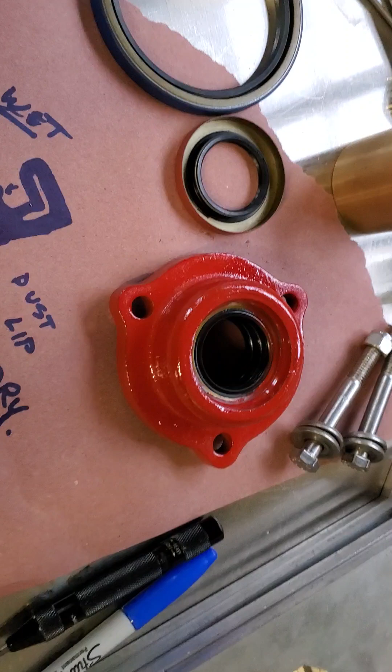I'm down for a few days at least, waiting for some parts from the machine shop and waiting for my radiator core to show up. So I'm tackling some small projects, namely replacing the seals on my PTO flange.

It's pretty self-explanatory, pretty easy to do. I think the only pitfall on these is the directionality of the seal. Sometimes these are pretty much all similar, but sometimes it's a little bit ambiguous which side goes on the dry side, which side goes on the wet side. So here's how I keep it straight.

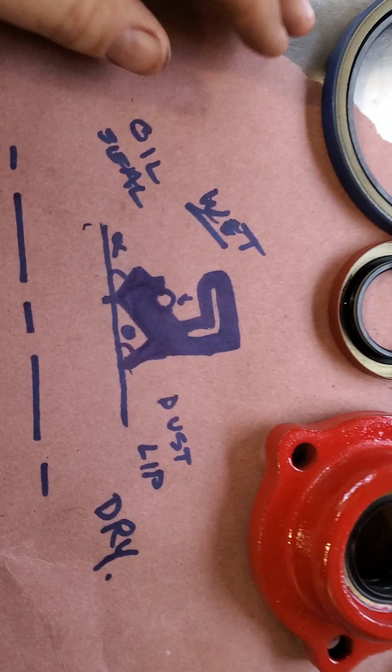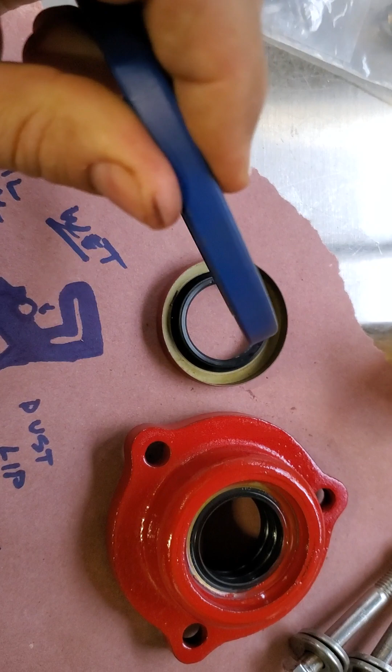If you were to look at all of these seals, they make these in all kinds of flavors. You can get double lip, triple lip. Some have garter springs, some don't. Some have fully encased steel reinforcement rings. Some are open shell, like this one. In this case, the open shell is kind of the Captain Obvious one. The open shell typically would point towards the wet side, and the garter spring would point towards the wet side.

On this example, it's not so clear, because number one, it doesn't have a garter spring, and number two, it doesn't have an open shell. So how do you keep it straight?

If you put them in backwards, they will leak, and they leak in really short order. Let's say I'm using this on a crankshaft pulley and I put it in backwards - as soon as I start that engine and move it 5 feet, that sucker's going to be pouring oil out of the seal.

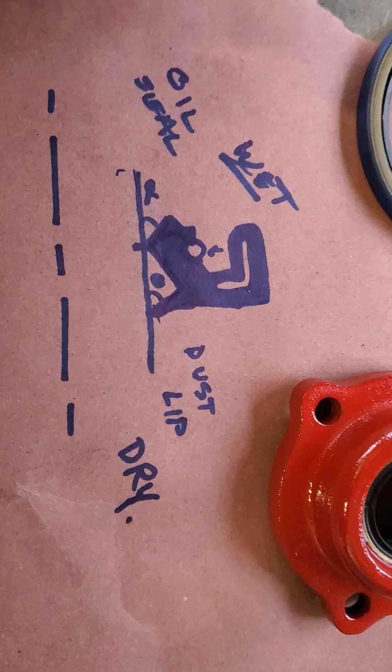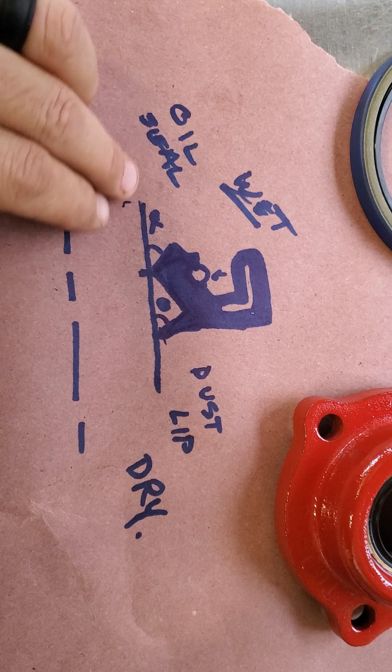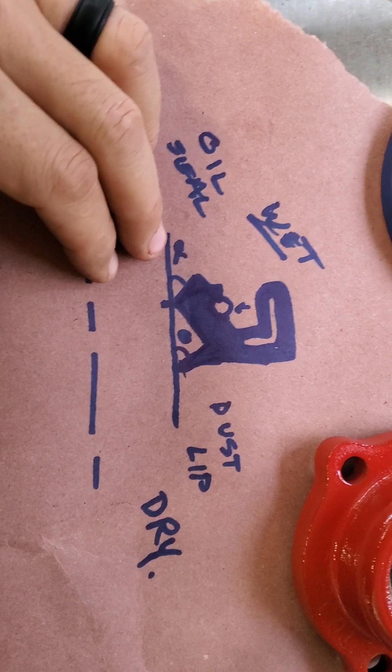So how do you keep it straight? Here's kind of a schematic. If I were to cut one of these in half and look at it in the side view, you've got the center line of your rotating surface, and then the sealing surface itself. So this would be the shaft surface, and as long as it's fairly smooth, no nicks or gouges, and as long as it doesn't have a tremendous amount of run out, these work great.

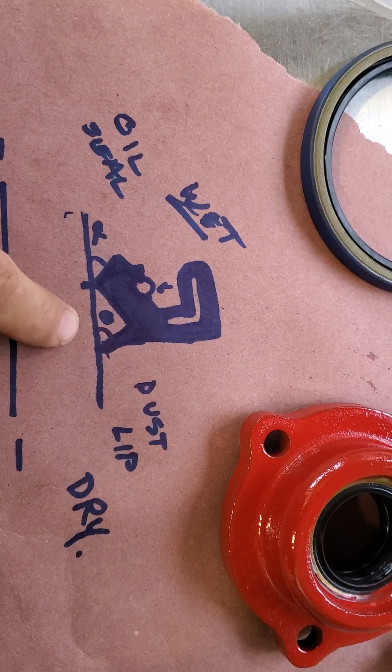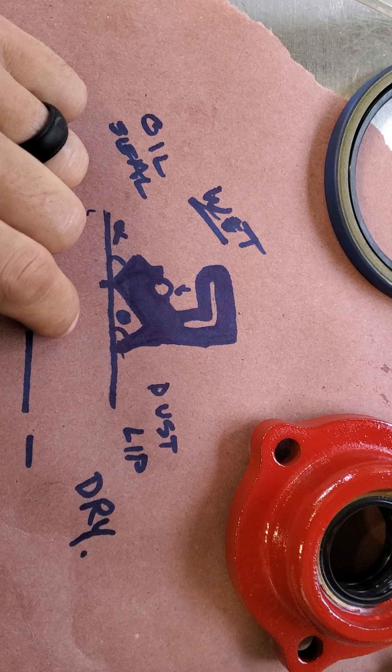The seals, again, I had mentioned they make these in a bunch of different flavors, but they all have two common components. One is they have a sealing surface, and then they have like a dust lip or something to keep crud from the dry side from migrating back through the seal and potentially interrupting the seal integrity.

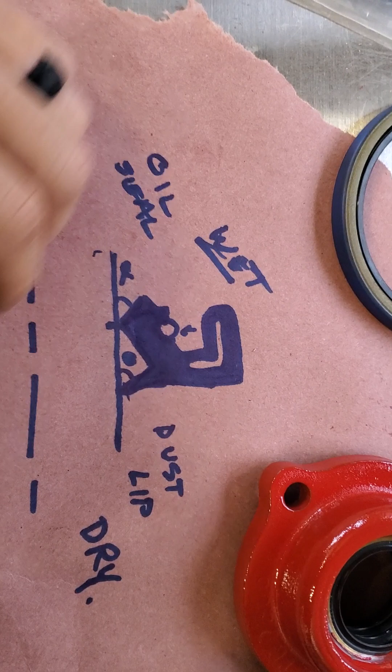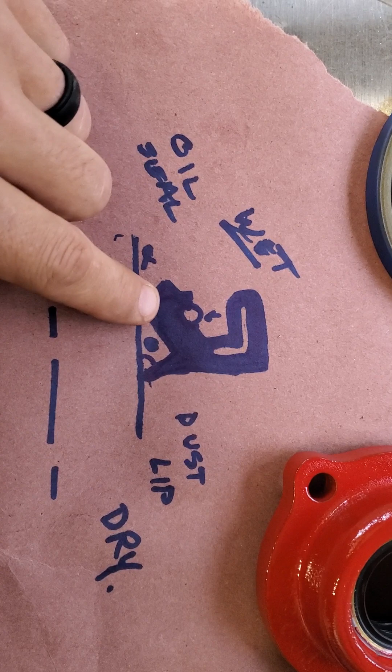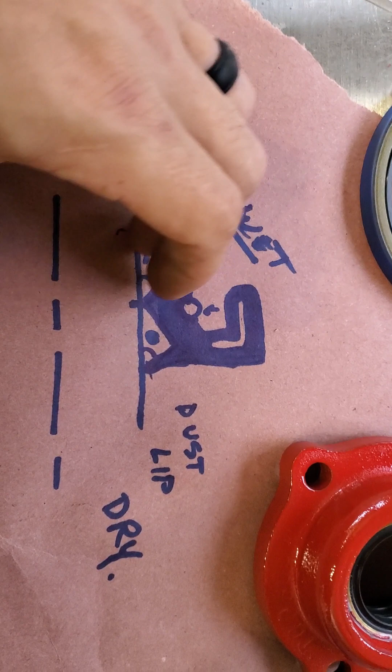So the wiper, or the oil seal itself, typically always has a much shallower angle, and it's always the longer flexible one. And if it has a garter spring, which essentially gives it a radial force, it allows it to tolerate more run out or more irregularity in the surface - that's always going to point to the wet side.

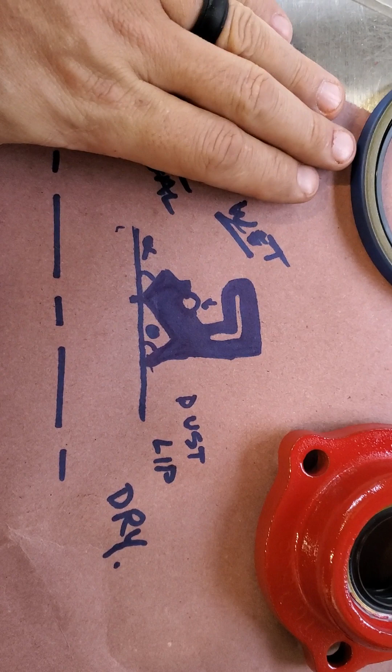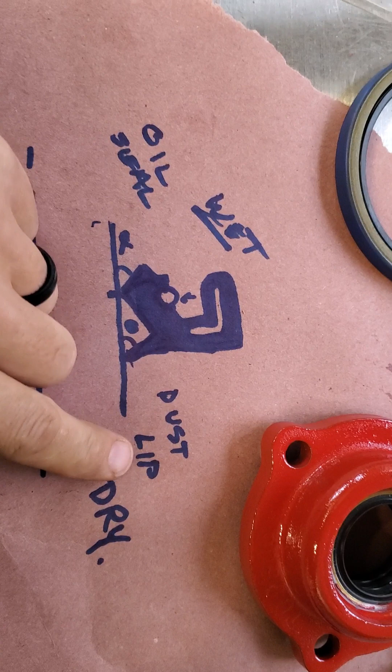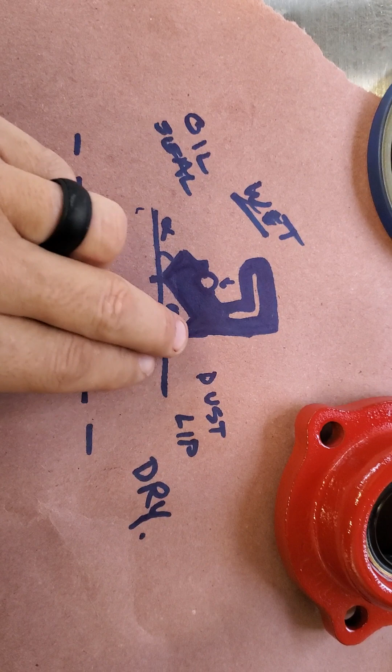Okay, so this would be like inside of the crankcase or the PTO case or whatever has the oil in it. The shorty, what I call the short side, that's always referred to as the dust lip, and its only purpose is to prevent stuff from migrating back through. If you get a bunch of dirt and garbage piling up on here, you don't want it to get back under here and potentially migrate in and interrupt that seal.

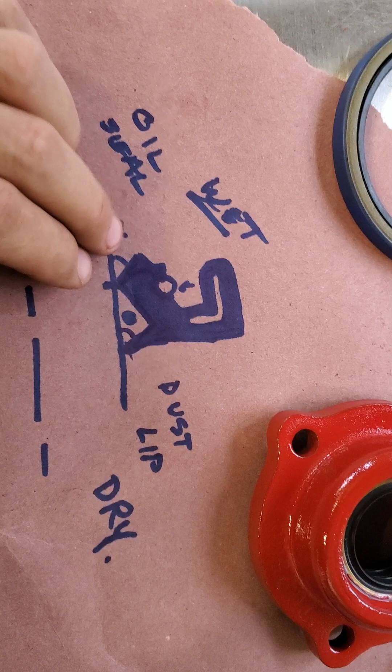So the dust lip is typically a much steeper angle, and it's much stiffer. The actual seal itself is usually the longer blade, and it has a much shallower angle. So that's the easiest way for me to keep it straight.

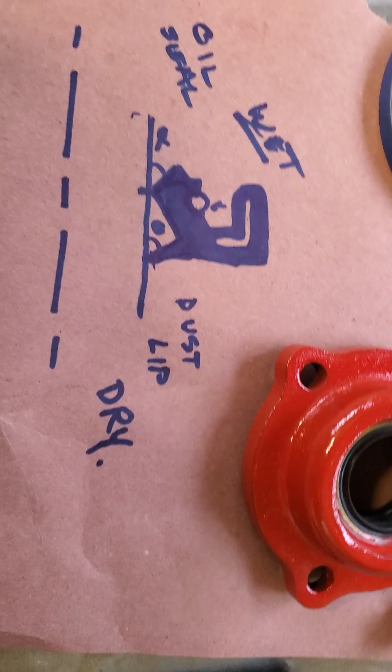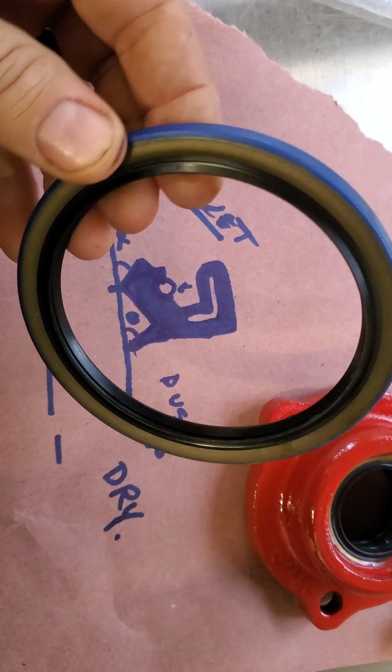So on this example, it's not particularly obvious to me which side goes where. Again, a lot of times you're dealing with a schematic drawing from the 40s, 50s, and 60s, which just has a picture of a ring getting installed, and it's like, well okay, what side? What side?

I would inspect this very closely, and I would see - all right, this is the stiff, really steep angle, so that's probably my dust lip. And then if I flip it around, this one doesn't have a garter spring, but if I flip it around, that's my flexible short angle, right? So that's the long side of the seal. That's the side you want to point towards the wet case.

All right, so that's how I keep it straight. Hopefully that's helpful for you. Again, if you put them in backwards, you'll know it pretty quick because they are going to leak like a sieve.